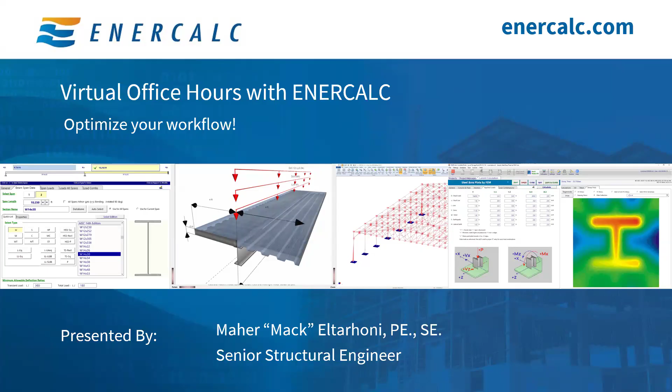With that, I will go ahead and hand it over to Mack to get going on our great program for today. All right, hello everyone, and thank you, Seth, for the introduction. And welcome to another session of our monthly office hours program. As Seth said, my name is Mack Eltarhoni, and I'm excited to be presenting to you today about the torsional analysis of rigid diaphragm module from ENERCALC's library of diverse and extensive modules.

So I'd like to start our session with a brief overview of the overall agenda. Today we'll be covering PDH announcement, ENERCALC's latest build, what's new in ENERCALC, and of course the meat of the presentation is torsion analysis of rigid diaphragm. And then lastly, we'll talk about registration for future office hours to get notified in your email, and of course a live Q&A at the very end of the session.

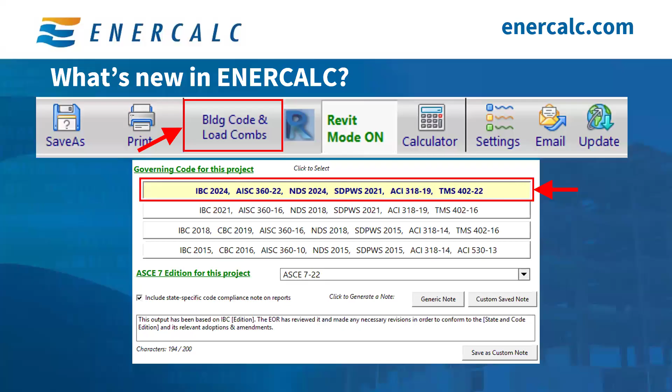I want to start with IBC 2024 and the decoupling of IBC and ASCE. ENERCALC supports IBC 24 and all of the referenced design standards. Once you click on the building code and load combinations button, you'll be taken to a page with IBC 24, 21, 18, and 15, and the corresponding design references. All of that is updated, and the new thing we've implemented recently is that we've decoupled the ASCE version from the IBC version.

So you can use IBC 2018 with ASCE 2022. This is in response to some jurisdictions requiring engineers to produce calculations with an IBC version that doesn't match the ASCE version. A lot of times they adopt a newer version of ASCE before adopting the corresponding IBC edition. Now the engineer can perform those calculations and have all of that information automatically included in the printed set without needing any post-processing in a PDF or similar.

It's important to know that when you change the code, the IBC and the ASCE, by clicking on this button, what happens is this changes the code selection for the project you're working on only. This does not become your default for future projects.

If you need to change the code selection for all of your future projects, using a particular code selection as a default value, go to the top left corner, click on settings, then click on default governing code and ASCE 7 edition, and this menu will pop up. You can choose the IBC and ASCE editions you would like, and click select. This will ensure that every new project you start in the future will have this specific selection for all of your future projects.

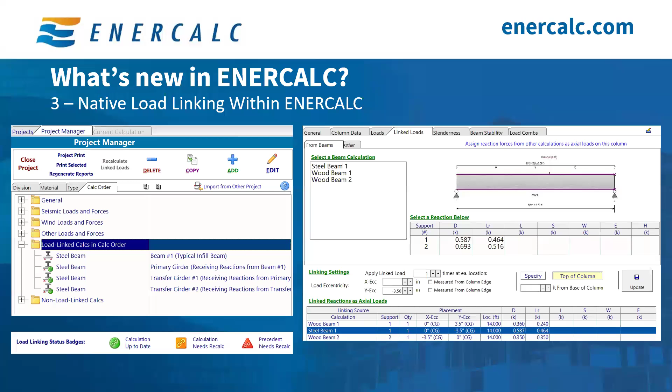If you'd like to learn more about load linking, we created a playlist of short videos on YouTube to walk you through how to use load linking step by step, so you can start leveraging this powerful tool in your daily workflow. I also added a new video recently to that YouTube load linking playlist for a full practical example of how to use load linking in real life design applications to transfer reactions from beams to columns, covering both wood and steel materials.

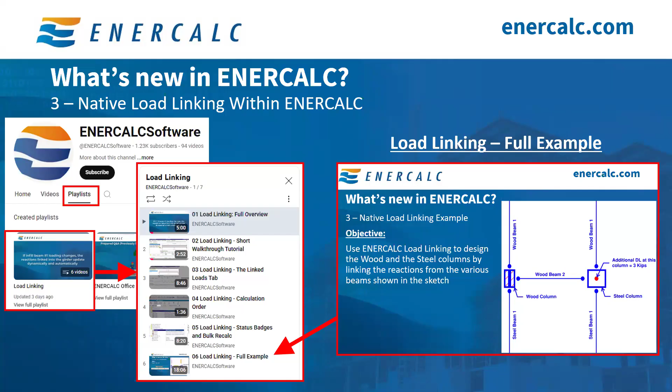You can export results to CSV in all of our modules, including columns, beams, slender walls, shear walls, foundations, and analysis modules. So you can get all the incremental and intermediate results that you need for post-processing.

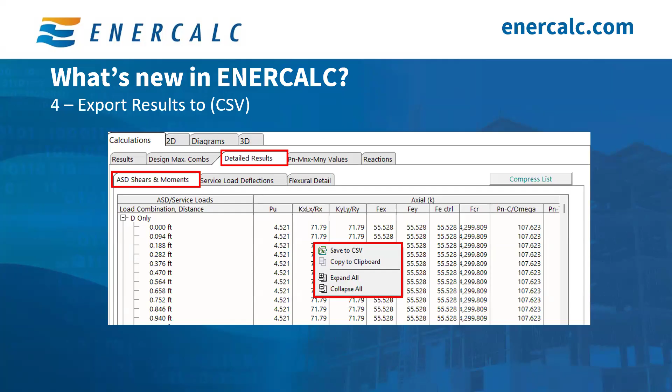By popular demand, we made an important update to the general footing module. Our users now have the option to specify top reinforcement in the footing for those cases where the footing experiences tension at the top, rather than the typical case where tension is at the bottom of the footing.

You can specify the rebar size and quantity separately for each direction, top and bottom. So you can specify parallel to X and parallel to Z at the bottom reinforcement. And then if you have top reinforcement, you can again specify parallel to X and parallel to Z separately for maximum flexibility.

As the results get displayed here, this is a snippet from the results summary. You can see we try to add a little more information here to help you navigate. For example, ENERCALC now notifies you if this is top tension or bottom tension, giving you good information on what's going on, so you understand where everything is and where you need to add steel, remove steel, or do whatever you need to do to optimize the size of the footing.

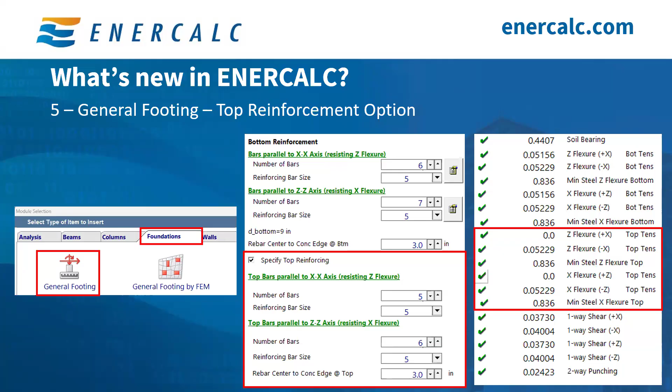Another item we want to highlight is ENERCALC for Revit. This has been extremely popular. ENERCALC for Revit is a Revit plugin that allows you to design structural members fully within Revit without having to export information to another calculation software.

You are not building an analytical model and trying to export a stick model and manipulate the nodes. You're not doing any of that. This relies on your Revit model and your modeled physical geometry.

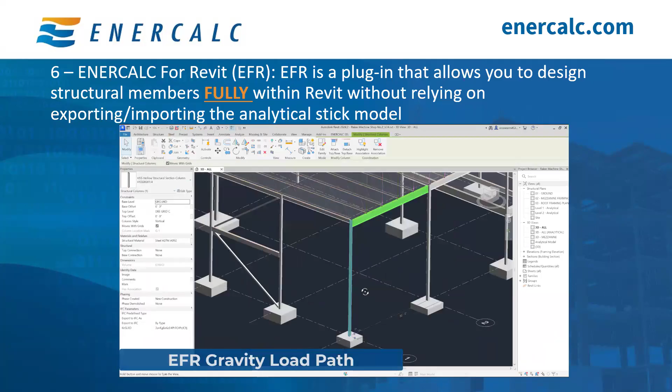This is a very simple point and click system where you click on a beam and it automatically detects the supports for it. It asks you what kind of load you have, walking you through the process like a wizard with prompts, and eventually tells you to pick the size that you need. Once you pick the size and make sure it's all good, you click OK, and Revit will automatically update the size in 3D space for you.

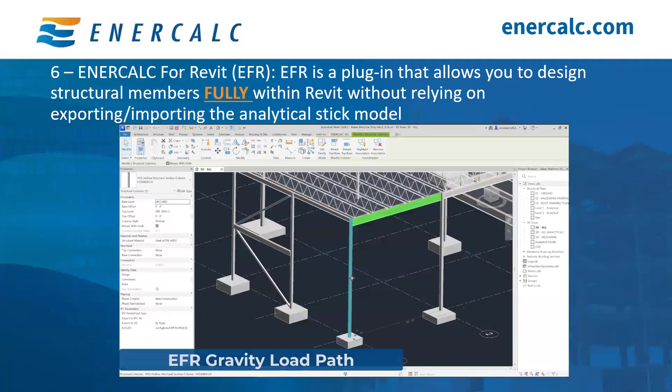This is a very smart, very easy to use tool, and you can do steel beams. You can do a full gravity load path because it can handle beams, columns, and foundations. It does composite beams, it does wood beams. So it's extremely versatile, and there is more development to come to integrate more materials and more design capabilities.

With every new update to ENERCALC, we send release notes to outline what changed, what got updated, and what got fixed. This gives you a quick idea about the top changes you can take advantage of, new features, and lets you know that certain bugs have already been fixed in case you've been having troubles. If you want to subscribe to those notes, just go to the update button and click subscribe to new build email updates, and this will tell you exactly what we changed, in case you're trying to track a particular feature request or an update to a calculation module.

Moving on, the focus of our presentation today is torsional analysis of rigid diaphragms. And rigid diaphragms are all around us. A lot of times you're designing a one-story or maybe two-story building, and you're not doing a full FEA analysis, you're not doing full 3D modeling of the building, you're just designing it one member at a time. So a lot of times you want to perform torsion analysis on a rigid diaphragm, such as a concrete slab, with shear walls, and you're trying to figure out how the loads are coming together.

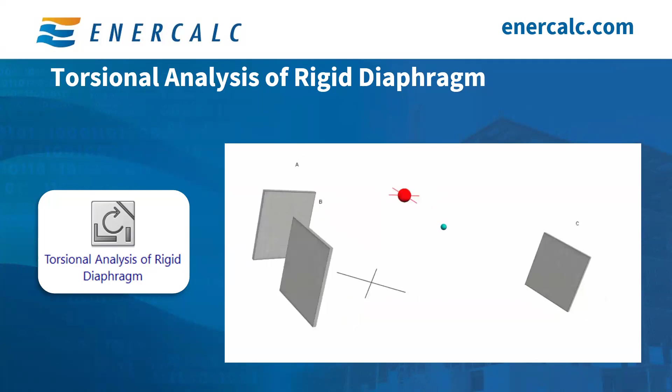ENERCALC has an extremely powerful tool for this that recently got even more updates. Without further ado, I want to dive into this. I have an example that covers all of this, and we want to go through that. So a quick overview of the capabilities and features of this module: it performs extensive analysis of rigid diaphragms based on various time-consuming scenarios, taking loads from different directions and doing a variety of things.

Second, it has diverse analysis options to accommodate the comprehensive needs of the design engineer. The user has the option to model different types of resisting elements. This includes walls, bending members, and generic resisting elements.

Detailed documentation of the rigorous analysis process that ENERCALC uses to arrive at the final results is also shown in our user manual, and we'll talk about it briefly. And lastly, as is the case with most ENERCALC modules, you have dynamic 2D and 3D sketches for visual confirmation of the overall construction assembly, including the location of the center of rigidity and the center of mass, and all of that is shown in a dynamic fashion that allows you to perform visual confirmations.

So the objective of today's session is to walk through a real-life example to demonstrate how this module can streamline your analysis process. Along the way, we will also discover the various options that ENERCALC offers that even though they don't apply to this example, we will still entertain them, look at them, and see what they do, so that everyone today can form a robust understanding of this module's capabilities.

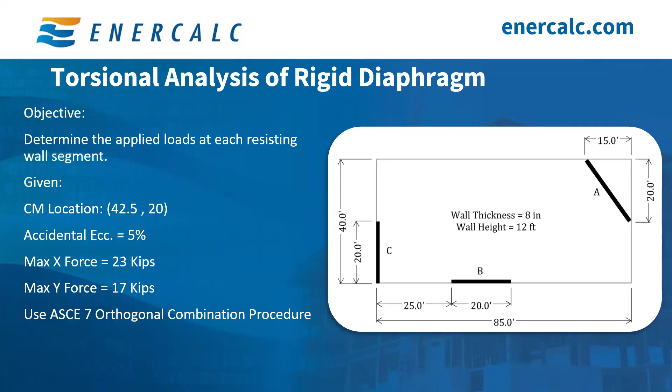But that's the gist of what we need to do today. So without further ado, let's dive into how to do that.

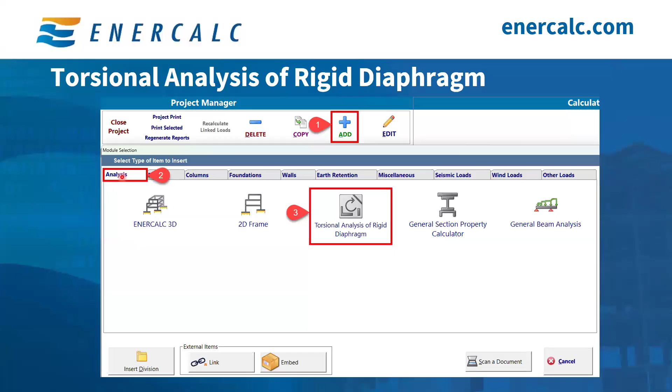So to start, this is the simple start that you have for all of our other modules. You click the Add button here, and then navigate to the Analysis tab, and click on Torsional Analysis of Rigid Diaphragm. This module has two primary input tabs right here at the top.

The first one is the Dimensions and Loads tab. As always, we start by giving our calculation a name. In this case, I will use the acronym TAORD, for Torsion Analysis of Rigid Diaphragm. Very simple, just very quick.

Moving on, the next item is the location of shear application. So the shear force is applied at the center of mass, and it is important to know that ENERCALC does not calculate the location of center of mass. This is because ENERCALC does not collect floor dimensions or other information, material or whatever, other information needed for us to determine the center of mass. Hence, the location of shear application is a user input.

And in this case, since the floor or the slab is rectangular, the center of mass is at 85 divided by 2, which is right here. That's the x dimension, which is 42.5, and 40 divided by 2 in the y direction, which is 20. And this is from the datum. As you can see, the datum point, the 0,0 coordinate origin point, is right here. This is for all analyses in this module. That's where everything starts.

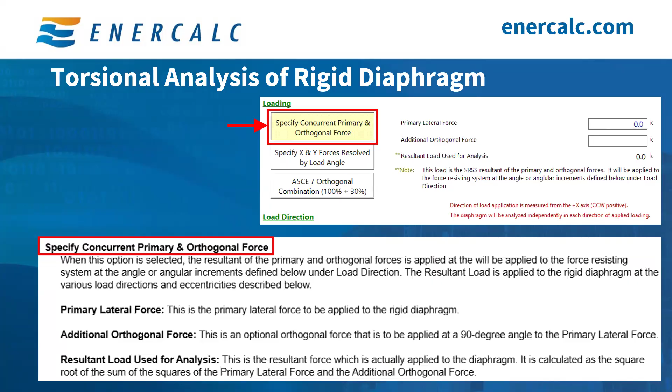If that's not how you want to apply the load, you can use method number two: specify X and Y forces resolved by load angle. When this option is selected, the forces are treated as independent magnitudes. The user inputs the maximum lateral load in the X direction, applied at 0 or 180 degrees - positive and negative, horizontal X. Next, you input the maximum lateral force in the Y direction, applied at 90 and 270 degrees.

Once both of these loads are determined and applied, they can be used for analysis of the diaphragm. For example, if the loads are applied at 30 degrees, the force is split into maximum Fx times cosine 30, added to maximum Fy times sine 30 - this is the total shear applied to the diaphragm. So you're putting in two independent forces, and based on the load angle application, we grab the component from the X direction and the component from the Y direction that goes into the applied angle, whether it's 30 degrees or 70 degrees or whatever.

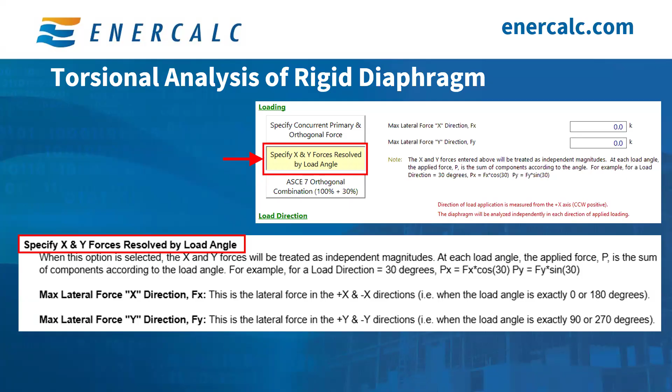All of these methods are useful in different scenarios. Keep in mind, for a comprehensive understanding of the most critical case, you want to apply the loads at different angles - maybe starting at 0, then 30, then 60, then 90. The load gets applied and rotated around the diaphragm so you can see which angle or direction results in the maximum shear load, or maximum load per resisting element - determining the most critical case per resisting element.

The third method, and this is the focus of today's presentation, is the ASCE7 orthogonal combination method. This method uses the prescribed ASCE7 procedure. The diaphragm module will perform a comprehensive analysis by running a series of analyses where it loads the diaphragm simultaneously with 100% of lateral force in one direction and 30% of lateral force in the perpendicular direction.

The user inputs the maximum lateral force in the X and the maximum lateral force in the Y. In our example, we have a maximum force in the X of 23 and a maximum force in the Y of 17. Now we combine them based on the ASCE7 methodology to examine this diaphragm and determine the load going into each resisting element.

To show what ENERCALC does with the forces when you pick this option, you can see the various combinations on the left. You start with positive 100% in the X and positive 30% in the Y. Then positive 100 in the X, minus 30 in the Y. Then minus 100 in the X, plus 30 in the Y. Then minus 100 in the X, minus 30 in the Y - that's the first four. Then you flip it, so the 30% is on the X while the 100% is on the Y.

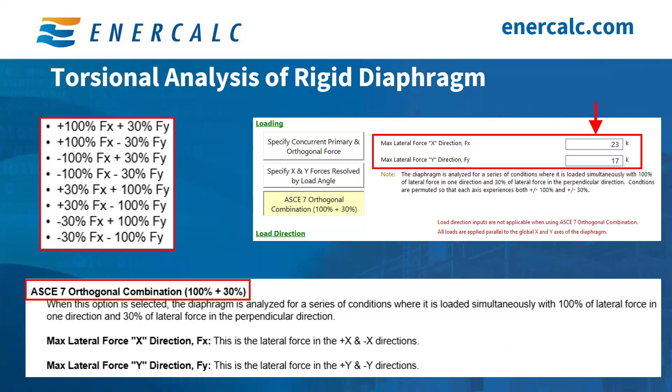Based on our example, the maximum applied load in the x direction is 23, and in the y direction is 17. Because we are using the ASCE method, we're going to have to see 8 different permutations, aka 8 different analyses. If you were doing this by hand, you would examine all 8 separately.

So the next item is the load direction. We have the load, and now we need to tell ENERCALC how we want that load applied. This gives the user a significant level of flexibility of running a series of analyses where the load is applied at various directions to determine the most critical case.

Now, for the ASCE7 orthogonal method, the load direction controls are all disabled, because ASCE already tells you the directions you need. You're doing this positive and this negative, then this negative and this positive, so it's telling you exactly the various cases you need to examine. So you no longer need to give information on the direction of the load. This knows exactly the various cases it needs to create.

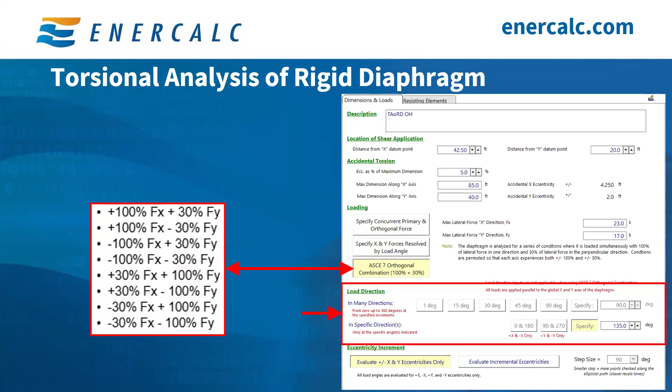However, if you are using one of the other 2 methods I specified earlier, then the load direction options will be enabled so you can make a selection. The user can analyze the load in many directions or analyze the load in one specific direction. So option number 1, you can do it in many directions. Option number 2, you do it in one specific direction, a very specific case that you want to look at.

I'm going to start with option number 2 because that's the easier one to explain. Loading in a specific direction, you can select to only check the positive and negative x directions. That means all you want to check is just the x direction, the 0, which is positive x, and 180, which is negative x. That's all you want to check. Or you can pick this one, which will only check positive y and negative y, 90 and 270.

Now, a third option would be to specify the angle where you want the load to be acting. So if it's not 0 or 180, and if it's not 90 or 270, maybe you have 60 degrees, or 130, 135, whatever it is. It's worth noting that this angle is measured from the positive x-axis. The positive, which points to the right, that's the 0. And if you're doing 135, you pass 90, and then go all the way to 135, so you are pointing to the top left corner.

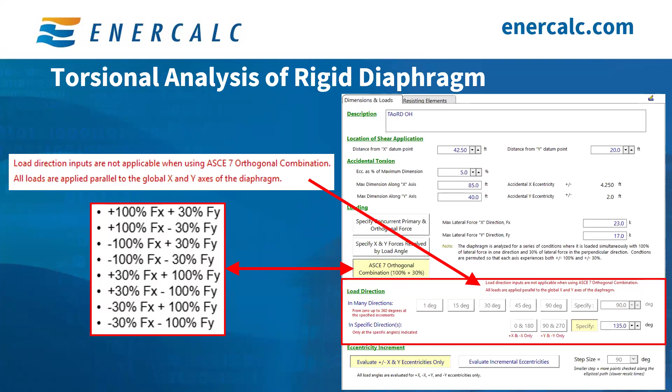Back to our example with the ASCE 7 orthogonal method - this is already specified by the orthogonal procedure, so you don't need to worry about the load direction. Now that we know how the load is applied for load direction, we apply a similar approach to the eccentricity increments.

You can evaluate eccentricity because we have accidental torsion here and 5% of maximum dimension. So you can evaluate the eccentricity in the positive and negative x and positive and negative y.

That means you apply the load - let's say we have a maximum eccentricity. For example, right here, this is a quick example: if you have maximum accidental eccentricity of 5 feet in x and maximum accidental eccentricity of 2.5 feet in y, then the first case you're evaluating is 5 in the x, 0 in the y - that's pretty much 0 degrees, positive x. Then you look at the positive y case, which is the positive maximum accidental y eccentricity, 0 in x, and 2.5 in the y.

And then you do the minus maximum accidental x eccentricity, minus 5 and 0, and finally you get back to the bottom with minus y, which is 0 and minus 2.5. So that's the 4 locations you're examining.

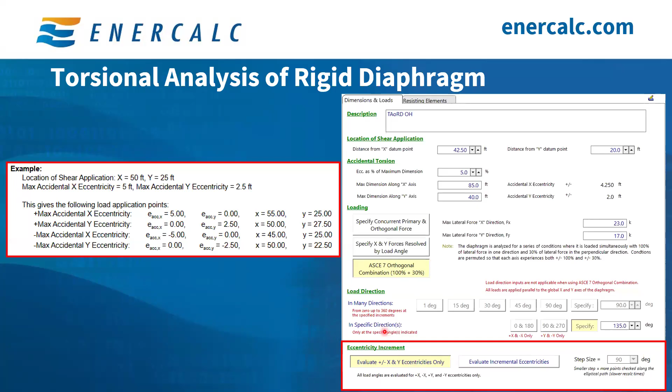Now, alternatively, if you want to be even more thorough - actually, before I get into that, you can see right here it says step size is 90 degrees. Again, positive x is 0, negative x is 180, positive y is 90, and negative y is 270. So it's almost like going from 0 in 90-degree increments.

Alternatively, for a more robust analysis, you can pick this option, which is evaluate incremental eccentricity. So to evaluate incremental eccentricities, you can say I don't want the step to be 90 degrees, I want the step to be 45 degrees. Then each load will be evaluated at these eccentricities.

You can see here the highlighted yellow cases - those are the same as the ones up here, because this is the 0, then the 90, then the 180, and then the 270. However, we introduced now an intermediate step: 45, 135, 225, and 315. So now you have a different point along the eccentricity ellipse that will give you an additional load case to examine.

A lot of times, just the positive and negative x and y eccentricities is enough. But in case you're worried and want to do something more robust, you can click on this option and specify a step size smaller than 90 degrees - maybe 45 or 30 or 15, whatever you would like to use. As far as the ASCE 7 methodology, the orthogonal procedure methodology, all you need is the positive and negative x and y, which translates to the step size of 90 degrees right here.

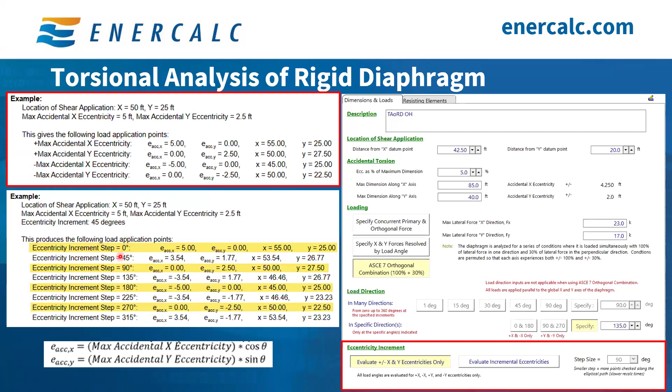At 45 degrees, you change the eccentricity location as you go based on this step. In this case, because we wanted 45 degrees, we ended up with 8 cases: 1, 2, 3, 4, 5, 6, 7, 8. But now because this step is not 45 degrees, this step is actually 15 degrees, so we end up with 24 cases.

So the same load, pointing towards the positive x direction, is applied at the first step, which is 0 degree eccentricity, then the second part at 15 degrees, then another step at 30, all the way until you reach 345. That's 24 cases for just the load applied at 0 degrees.

Then we apply the load at 30 degrees, since that's the load direction, and move it around the eccentricity - first at 0, then another step at 15, another at 30, and so forth. You repeat this, and that's the breakdown of how the cases work, amounting to 288 rigid diaphragm analyses.

I'd never do this by hand. If I were doing this manually, I'd be lucky to end up doing 3 or 4 cases and call it good. But now that you have this powerful tool, you can do this in the blink of an eye and get very accurate analysis that can help you sleep a little better at night, knowing you left no stone unturned.

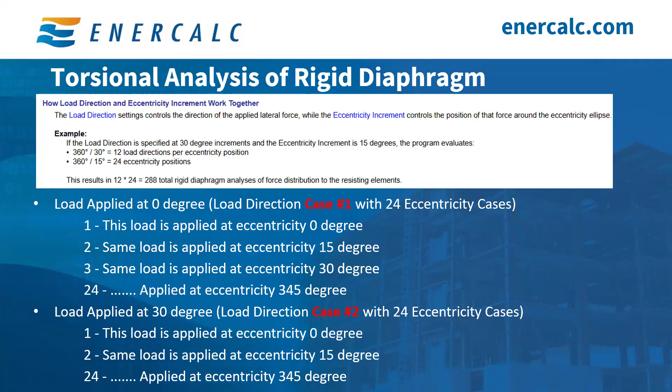Now that we fully understand the vast flexibility and comprehensiveness of ENERCALC analysis, we're ready to move forward with our example. We will be using the ASCE 7 orthogonal method for loading direction, and we will only evaluate the plus and minus x and y eccentricity.

This means we have 8 load cases to cover the ASCE 7 method - those are just load directions. Because each load needs to be applied at positive x, minus x, positive y, and negative y, each of these 8 cases has 4 different eccentricity locations around the diaphragm. So you end up with 32 analyses to ensure all bases and combinations are covered and you're in compliance with the ASCE methodology.

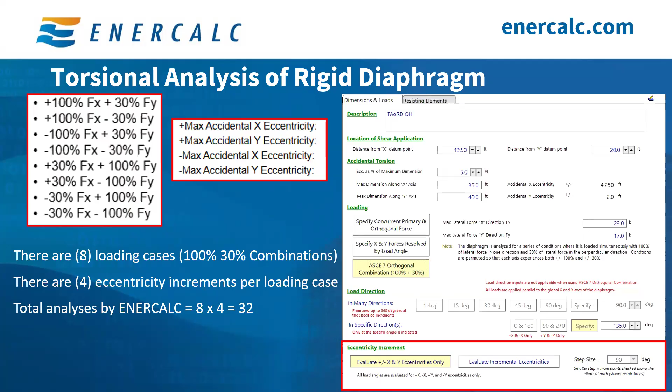Now that we've set up all of our loading and the analysis procedure, we've finished everything we need to do here, so we wrapped all this up. We are ready to model the resisting elements, since so far we have not modeled those resisting elements.

ENERCALC allows you to model 3 types of resisting elements: the first and most common is walls, the second is bending members, and the third is generic resisting members. For concrete and masonry shear walls, these can be modeled as walls under the wall tab. If you have column moment frames or cantilevered columns, you can model that under bending members. Lastly, generic resisting elements is a catch-all term used to model other resisting elements, such as braced frames or other complex resisting elements where the stiffness was determined from another analysis.

Additional information will be needed here, but one of the main inputs you'd need is the flexibility, which is the inch per kip of applied load, so ENERCALC can perform the calculations properly. Our example here has concrete walls, as we discussed, so we will model these under the walls tab.

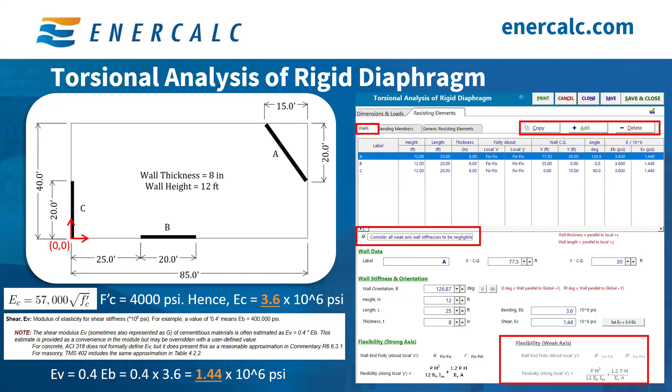As you can see here, the flexibility in the weak axis is grayed out. This is because I enabled this option that says consider all weak axis wall stiffnesses to be negligible. I don't want the weak axis of the wall to be taking any load, so I'm assuming it's infinitely flexible, hence it won't take any load.

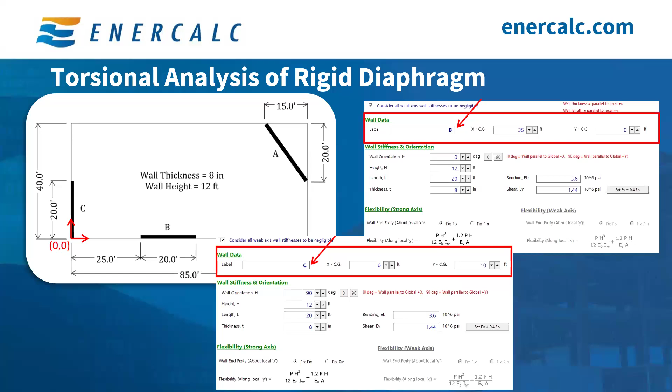Pretty much we do the same thing for wall B and wall C. You just put all of the information, the center, the orientation. Orientation of wall B is 0 because it's parallel to the X. Orientation of wall C is 90 because it's parallel to the Y direction. And once you populate all this information, we're ready to evaluate the results.

If you click on the 2D tab, you get this dynamic sketch. It shows wall A, wall B, and wall C. The green dot right here is the center of the load application, which is the center of mass. And you can see the red dot right here is the center of rigidity. And this circle is the eccentricity.

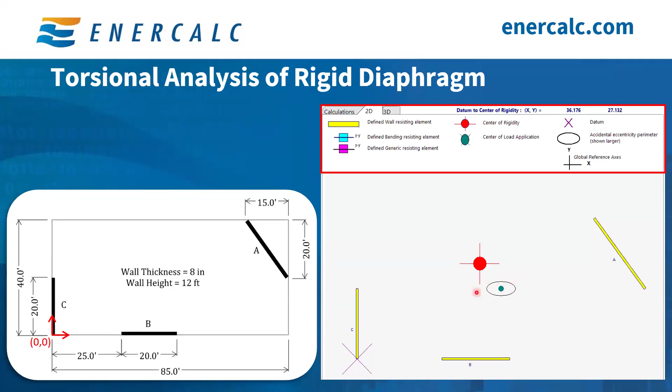If you're going all the way to the right, that's positive X. Eccentricity here, positive Y, minus Y, and minus X. And if you have an increment of not 90 degrees but 15 degrees or whatever, then you are somewhere along the eccentricity ellipse right here.

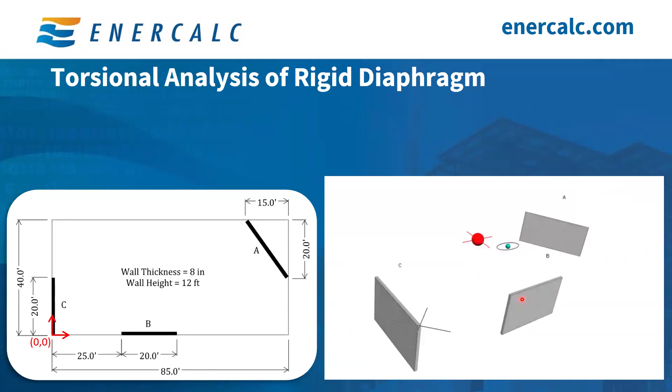Next, of course, we have the 3D tab, and this is always satisfying to see the modeling in 3D space. It's great, especially as a teaching tool to younger engineers to help them visualize what we're dealing with, especially since it shows already the center of rigidity and center of mass.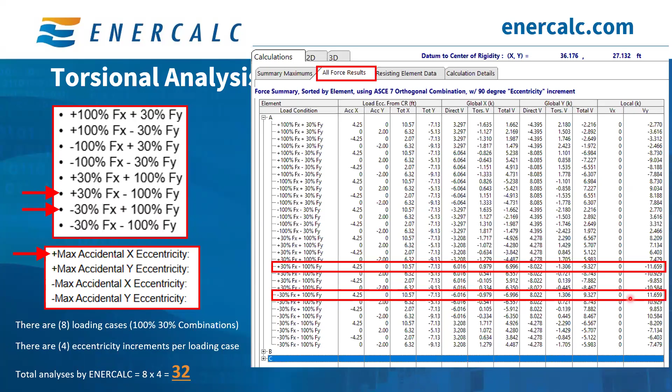If you also check here under the All Forces results, if you want to see some intermediate values, you can see that for wall A, those are the 32 combinations, and you can see combination number 1, that's the eccentricity, combination number 2, that's the eccentricity, and so forth. You can see that these two combinations are the ones that controlled, so positive 30 Fx minus 100 Fy, and at eccentricity of positive X. Same thing right here, so those are the ones that controlled for wall A.

Again, those values are the same as what's being reported here. And if you go to the resisting elements, you can see again in the local x-axis, we neglected the stiffness, and that's why it says neglect. If we told it to calculate the stiffness, it would have calculated it as shown here. But you can see this one along the y, the strong direction, is to the power of 4, and this one is to the power of 2, so it's a lot smaller.

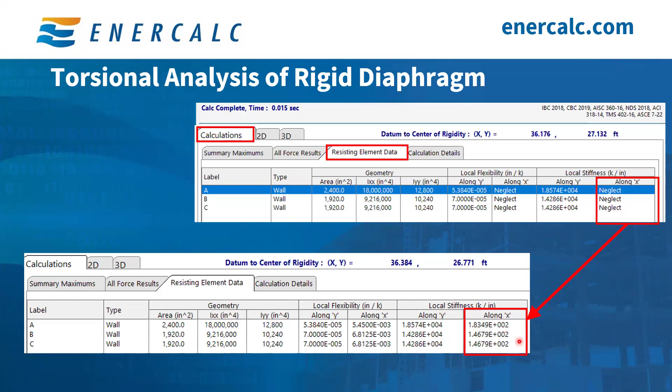You have a wide variety of information here that covers a lot of intermediate values, the element matrix values. It shows you the center of rigidity, the diaphragm matrix values, and the diaphragm displacement, delta X and delta Y. And it's important to know here that ENERCALC has fully detailed theoretical information on how this module works.

So you can check it out if you want to dig deeper into this. If you want to access this page that has all of the equations and the documentation, all you need to do is go to the calculation details and then click either on center of rigidity or the diaphragm matrix, and then click on this question mark icon right here, and this will take you to the page that has all of that information.

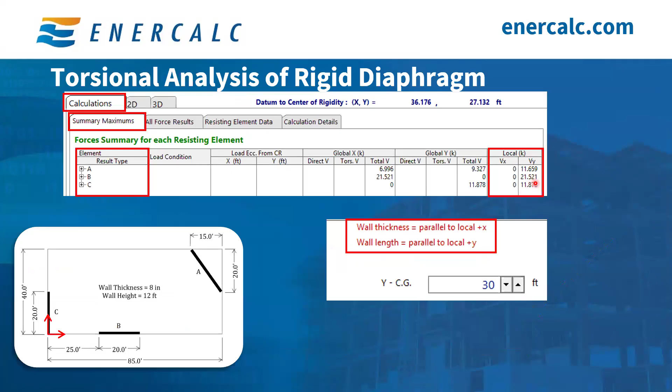As always, I want to wrap this up by saying that if you are trying to just get the maximum values, then pretty much you can do that very early on, right from the very beginning, and get the load that's going to your wall. Otherwise, everything else is just intermediate values that you probably wouldn't need unless you're trying to dig deeper into the calculation.

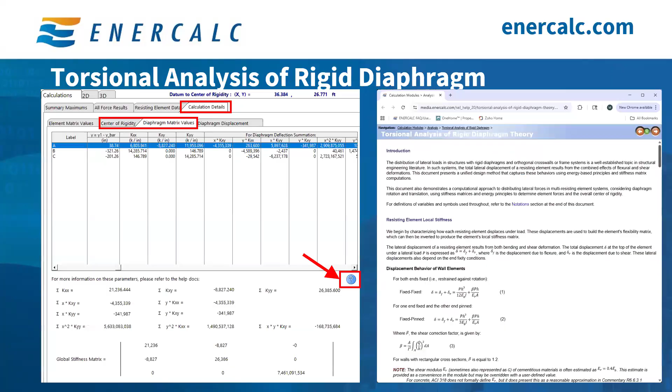Hopefully that was mostly covered, but if Mac wants to pull up the interface, we can dive back into some of that. Obviously, the first and foremost result that's displayed is the force distribution. And then if you dive into the calculation details, like Mac was showing closer to the end of our session, you can look at granular breakdowns of how these things are calculated. So you can dive into the displacements of the diaphragm, which is your delta X, your delta Y, your delta theta, which is the torsional displacement, and then you also have the sum of k values and so on.

Go ahead, Mac. Yeah, no, that's exactly it. You just go right here to the calculation details, and you can see all of the intermediate values right here for every load case or loading condition.

For wall member elastic modulus, if we use wood or steel material, in that case we don't have a selection table. We need to enter the values manually, right?

So this has to do with those three different options for applying resistance to your diaphragm. You have your wall elements, your bending resisting elements, and your generic resisting elements. For walls and bending, you're able to put in geometry and material properties and get calculated flexibility values, which then feed into your calculation.

If you don't have something that fits neatly within those categories, for example, cantilever column for bending resistance, or simple planar behavior of a wall like a solid concrete shear wall or masonry shear wall, if you don't have one of those conditions, then it's more appropriate to go to that generic resisting tab where you can manually input a calculated flexibility value. For example, if you're doing an NDS wood shear wall, you would calculate the deflection of that shear wall under unit load, for example a 1 kip lateral load, according to the NDS procedure for shear wall deflection. Then you'd be able to feed that flexibility value in as a generic resisting element.

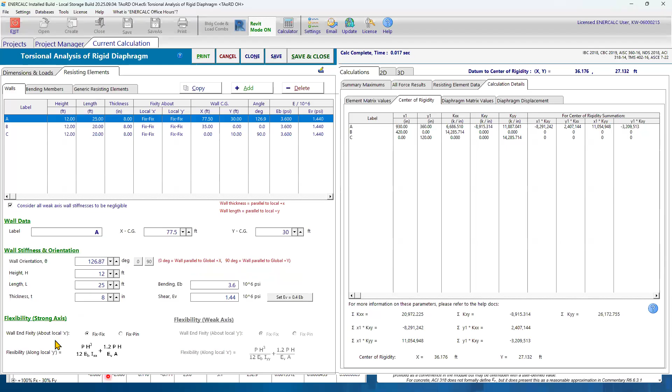Yeah, and just to show you, I think you guys can see on my screen, that's where I would model that, right here. So generic resisting element, because under wall it automatically calculates the flexibility just based on this equation right here. Since this equation might not be applicable, you can just do your own calculation outside and figure out what your flexibility is, and then you can put that information right here, and ENERCALC uses that.

All right, question from Bill. This was a good example of complex geometric wall layout, not a very good example to use for engineers learning torsional analysis of rigid diaphragms. Would you consider posting a YouTube video showing an orthogonal wall layout, maybe matching the analysis used by Amrhein in the Reinforced Masonry Engineering Handbook?

Good question. So a couple things to note about this. Under orthogonal conditions, the results you're seeing here in ENERCALC would converge with some conventional hand analysis methods. Where the ENERCALC approach outpaces hand approximations is when you get into skewed elements. So we were intentionally using skewed elements here in order to show that ENERCALC supports that capability.

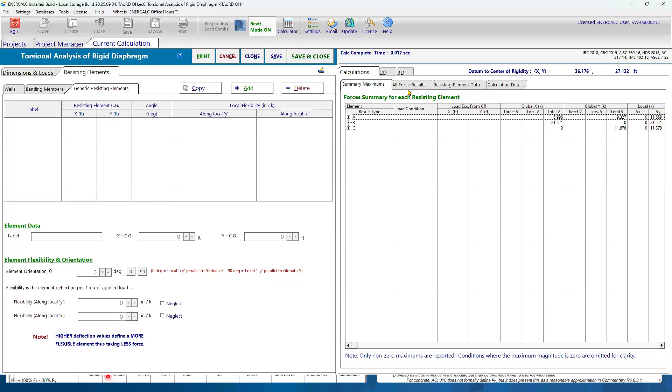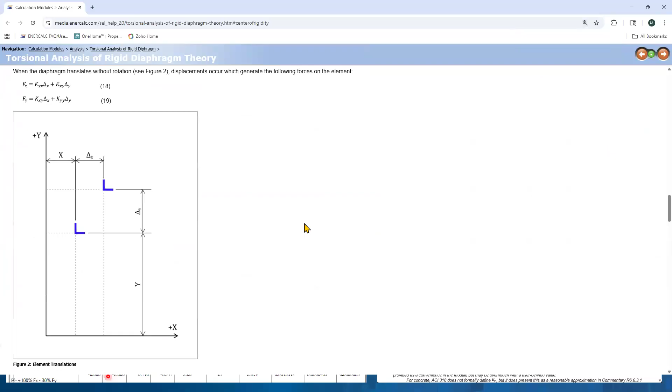Obviously, if you were trying to use this as a teaching exercise to teach young engineers who are not familiar with rigid diaphragm, then this would be kind of jumping into the deep end. But if you're learning hand analysis, or you're mentoring young engineers who are learning hand analysis, you would be able to demonstrate close convergence between the ENERCALC results and hand approximations for orthogonal conditions.

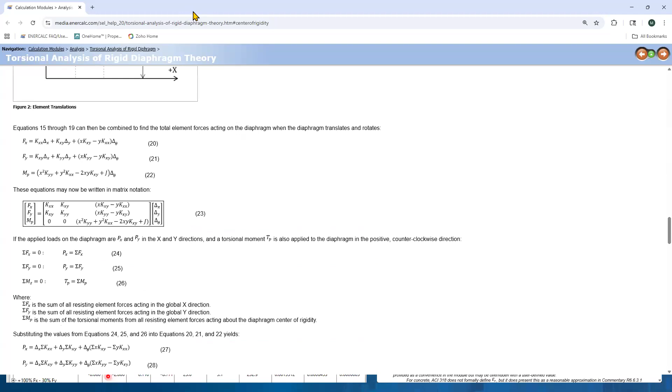Now, because this is driven by a fairly rigorous stiffness matrix analysis, some of those hand approximations may diverge when you get into skewed conditions. But yes, you're correct, this was designed for experienced engineers. Today's session in particular was designed for experienced engineers who already have a frame of reference for rigid diaphragm, and this was mainly about how to use the tool. But once you're familiar with rigid diaphragm and the module, it can also be a teaching aid for young engineers as well, for sure.

Mac, did you want to add to that? Yeah, I agree with what you said, and I want to emphasize that today's session is about showing you what each option does. Having a skewed wall is when this becomes powerful, because with just regular orthogonal walls you wouldn't even need to be in the ASCE 7 orthogonal combination, since you wouldn't have the irregularity anymore, the non-parallel irregularity I was talking about.

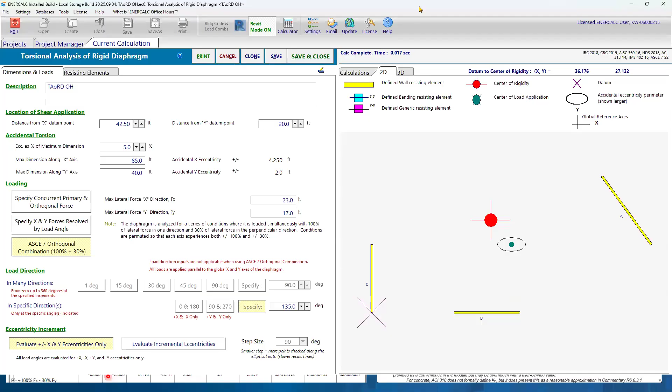So yeah, this was meant for someone who knows a little bit about rigid diaphragms, but to showcase that this can do a lot more, and you can build a model that has all kinds of walls, all kinds of crazy things, and this will still handle it very efficiently.

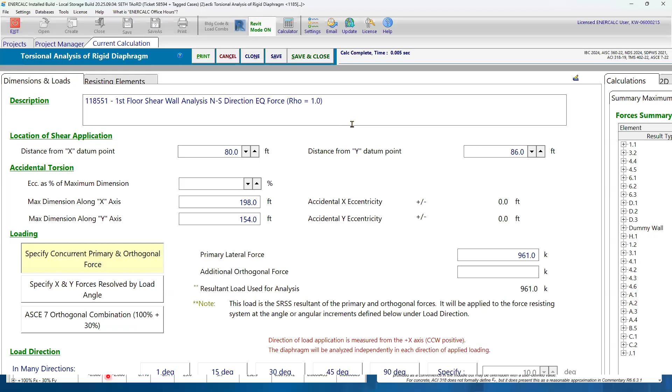All right, next question from Michael. Can you please show us a real world model of the structure you just analyzed? So, kind of like we touched on a moment ago, this was a deliberately selected model to get in the sweet spot between not too complicated for a one hour session and not too simple as to be trivial. Not every building is going to have three resisting elements, two orthogonal and one skewed. We were just trying to do a case study that fits reasonably in the time allotted. There's a question lower down about maximum number of resisting elements.

As Mac is showing here on screen, you have the ability to go up into much more complicated analysis. This is a complicated analysis that involves generic elements in both directions, wall elements in both directions, skewed elements with a subtle skew because the building turns a corner. This could be a parking structure, an L-shaped concrete frame building with shear walls and moment frames. You have the ability to go much more complicated with very real world, large scale commercial lateral resisting systems.

For sure, and I want to add that while the example is simplified so you can keep the ball rolling, having just simple orthogonal walls happens in real life all the time, and having a skewed wall happens, of course, in real life all the time. But to make things easier from a presentation perspective, you kind of have to water it down a little bit, but that doesn't take away from its 100% real applications.

And you can see ENERCALC can handle something like this. That's the point. That wouldn't be an example we can cover in 30-40 minutes, but you can see here your skewed wall, orthogonal walls, everything - you have different types of resisting elements. So the idea is that what we did today can be amplified to model something quite complex and be very useful in your daily applications. But this doesn't require any additional knowledge than what we covered today. It's just more of it, that's all.

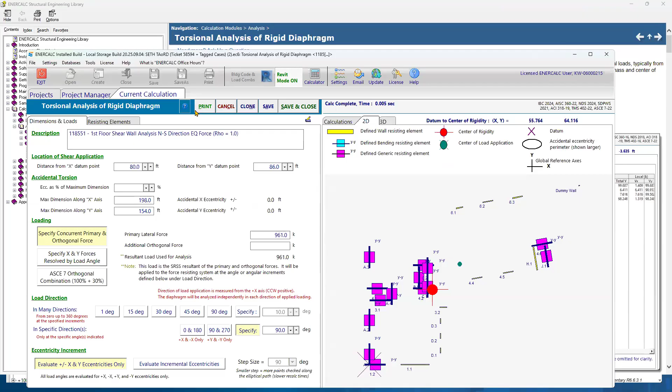I see you're highlighting some documentation there. I do recommend every time you're working with any ENERCALC module to just click on this little question mark, because that will take you to the exact page in the user manual. For the torsion analysis of rigid diaphragm, the first thing we list is the limitations - it does assume rigid diaphragm, flexible diaphragm effects are not included, and it assumes it's already rigid and has been detailed properly for that.

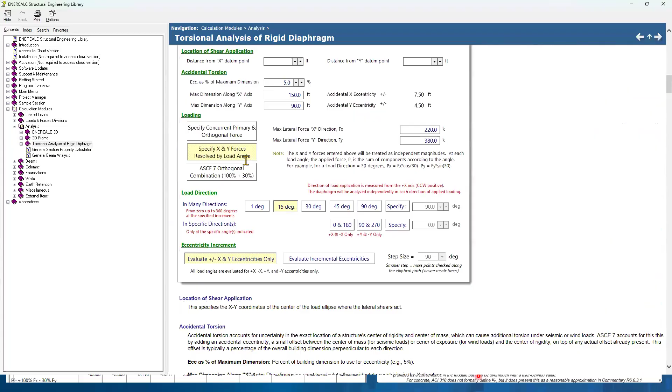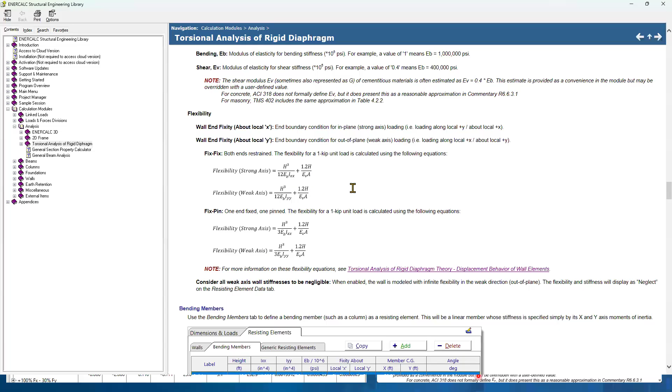But I just wanted to highlight the user manual here, because there's so much information. A lot of the snippets I brought today into the presentation are from the user manual. The user manual is packed with really useful information. So I encourage everyone to take a look at it and see how our flexibilities are calculated and where they come from, the shape factor - everything we include here is useful material, in my opinion, to get people moving in the right direction.

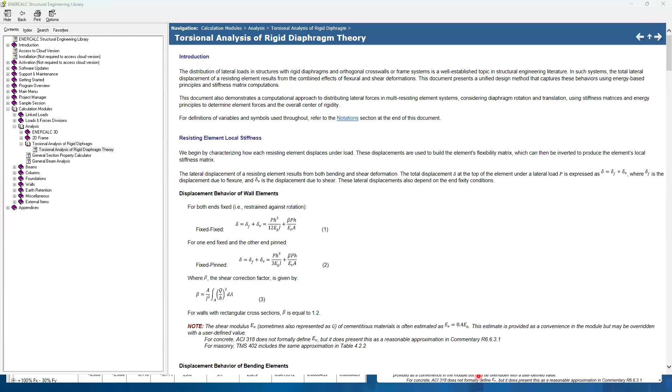Yeah, and I just want to chime in while Mac is showing the documentation there - if we dive a little deeper into the rigid diaphragm theory, to call back to Bill's question earlier about young engineers who are just learning about rigid diaphragm, a lot of the new documentation that Derek and the rest of the engineering team have helped curate here for the rigid diaphragm theory section can be extremely instructive for young engineers who are just getting into the concept of what is a rigid diaphragm, how is this behaving structurally, what is the actual engineering math behind how the system is being characterized, how the forces are being distributed.

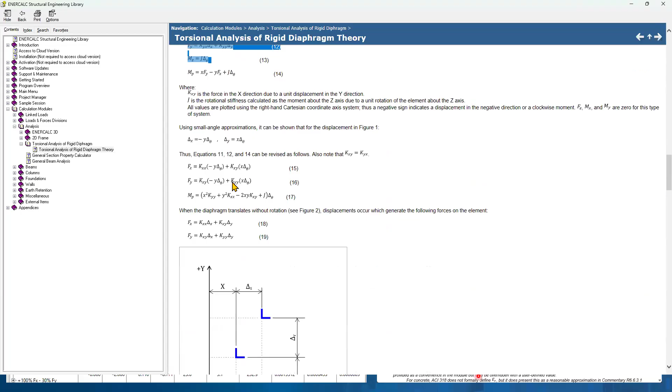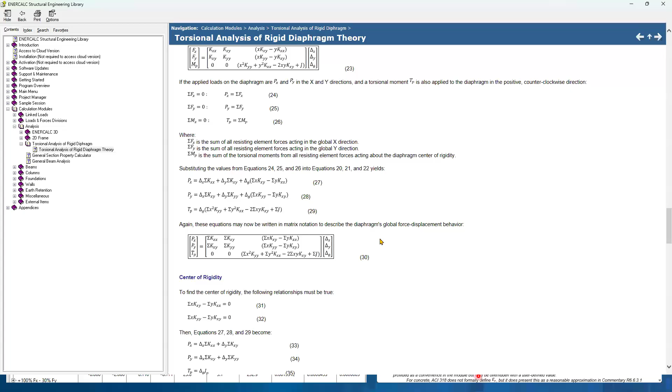You can basically walk through using this documentation and the granular outputs that Mac was showing you guys, and you'll be able to demonstrate convergence to the penny between hand calculation and what's being shown in the module, and get an understanding of the theory from a very fundamental standpoint. So that's some really great resources as far as the mentoring of young engineers.

Yeah, absolutely. And we're working on creating a little bit more documentation, but you can really follow this quite a bit, and you can see a lot of the intermediate values that I was talking about earlier.

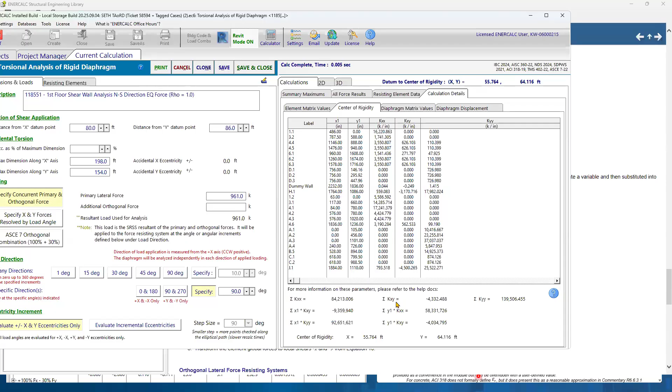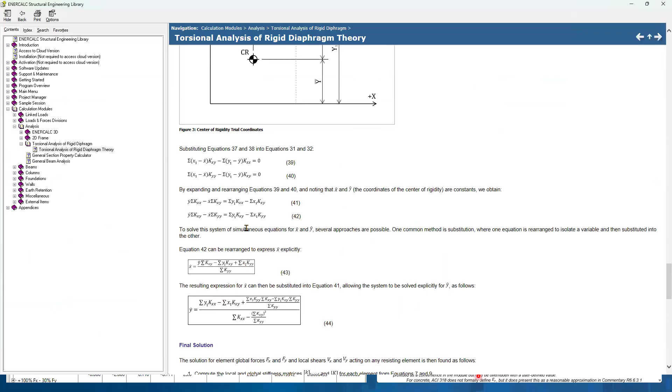If you click on calculations detail, for example center of rigidity, you can see all of that information, how it's pulled together and how it eventually calculates the location, X and Y. All of this information, the summation of kxy, summation of kxx, and all of that is coming to play right here in the calculation. So anyone can perform a hand calculation following the methodology here to converge exactly with the results that ENERCALC shows.

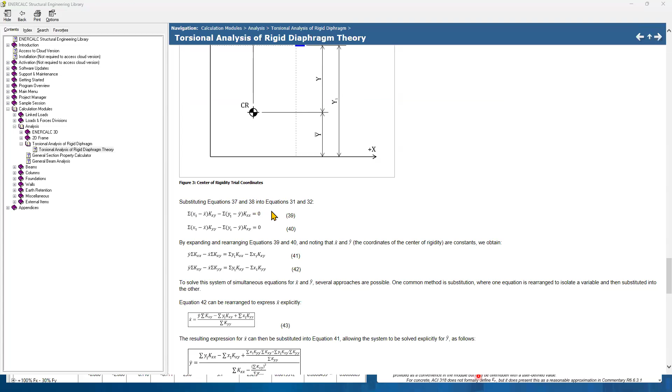All right, next question. Does ENERCALC have any plans to add load linking from the rigid diaphragm analysis to concrete or masonry analysis modules? There absolutely would be that capability for possible future work. If you want to make a feature request, you can reach out to support@enercalc.com to dip your oar in the water on feature requests for future development efforts.

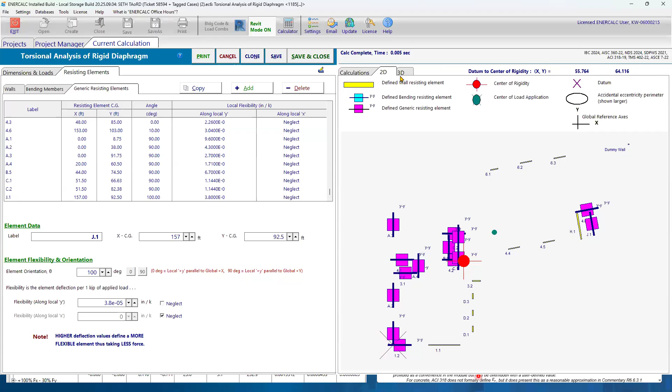It's also worth noting, if you're interacting with a module that already has load linking capabilities exposed, there are places where you can go vote in a survey about what load linking capabilities you want to see incorporated next in ENERCALC. I don't recall if the lateral modules or rigid diaphragm are included explicitly on that survey, but you can take a look and make your voice heard about what features you want to see, and send that over to the engineering team at support@enercalc.com as well.

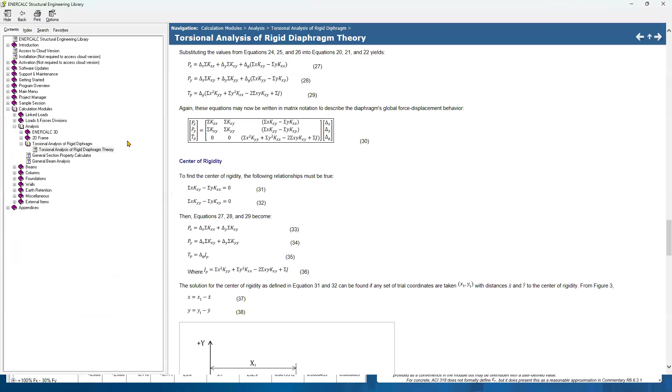All right, next question. We frequently have buildings with more shear resisting elements than your current maximum. Can you look into adding more? Just to make sure we're on the same page, the current maximum is 160 resisting elements, which is a pretty decent number. But if you're consistently bumping up against that limit and it's still not meeting your needs, reach out to the support team, and we can look at your situation and how many other customers, if any, are asking about that to see if it warrants attention from the development team. Definitely reach out to support about that, we'll want to hear more about what you have going on.

Yeah, it's right there, it supports up to 160 different resisting elements. I'm not sure if he said the number or not, but that's perfect.

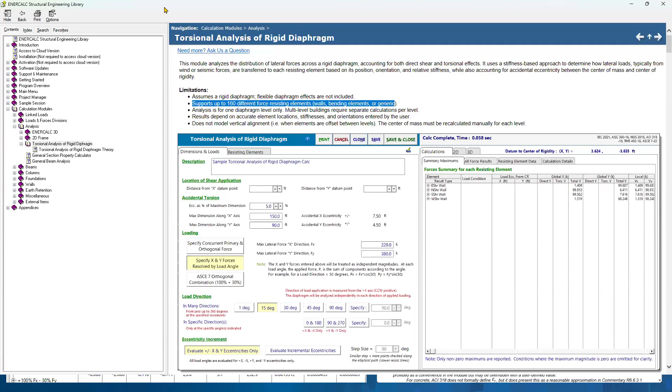All right, next question. How can I print out displacements and torsional moments results in PDF? I do not see those results in the summary. One thing I'll note is to make sure you have the latest build, because torsional analysis of rigid diaphragm recently went through fantastic changes where we improved the granularity of those outputs that Mac was showing you.

We improved a lot of the wayfinding and navigation on the input side, and introduced all those new granular results tables. Not everything you saw today in those tables on the output side is being incorporated directly into the report. Some of it is, some isn't, just because of the large amount of analysis results, not all are exhaustively included in the report. So if there's something you specifically need or would like to see in the printed report, feel free to reach out to the support team with a feature request, and we'll see what we can figure out. In the meantime, you do have all of those results in tremendous detail on the output side of the application itself.

All right, well, we're about... oh, I see another question coming in here. Oh, that was just a thank you. Good job, Mac.